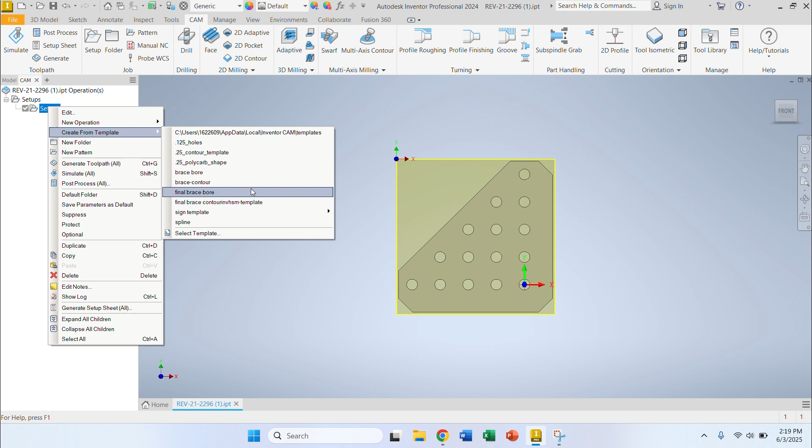So what I'll do is, I have these things called templates. It's a preloaded template, exactly what it sounds like. It's a 2D bore, and it has the correct speeds and feeds and everything like that. So I'll right click, hit create from template, and there's a few options, don't worry about it. It's called final brace bore. So I'm going to open this up.

So this is the inside of the toolpath, the details of the toolpath. So here are your feeds and speeds.

These are vitally important. In a 3D printer, let's say you just want to go 50 millimeters per second, it's one single setting which you change to go fast or slow, how fast the printhead moves. In CNCing, it's infinitely harder. You have how fast the tool spins, how fast the gantry that the tool is on moves, how fast the tool goes up and down, in and out.

So much stuff. So what I've done is I spent way too long, like a year or two, going through online forums and doing testing myself, optimizing it to the tools we have here. So basically these speeds are really good. They work tremendously well. They're not sluggishly slow that it takes forever to do a single part, but they're not too fast that you're churning through drill bits or end mills and breaking them, costing the team a fortune.

So this is what I would go with. And since it's a template, it already has the tool preloaded. So for all of our holes, if they're reasonably sized, I use an 1/8 inch end mill. 1/8 inch is listed here as 3.175 millimeters. I don't know why, that's an 1/8 inch end mill.

If you have massive holes, let's say a 1/4 inch hole, you can choose to do it with this 1/8 inch end mill, or do it as a contour, because the contour uses a 1/4 inch end mill, so that might be a little faster. Or you have to do some weird shape cutout or something. But for a traditional hole for a bolt, that's preloaded like this and reasonably sized, an 1/8 inch end mill is fine.

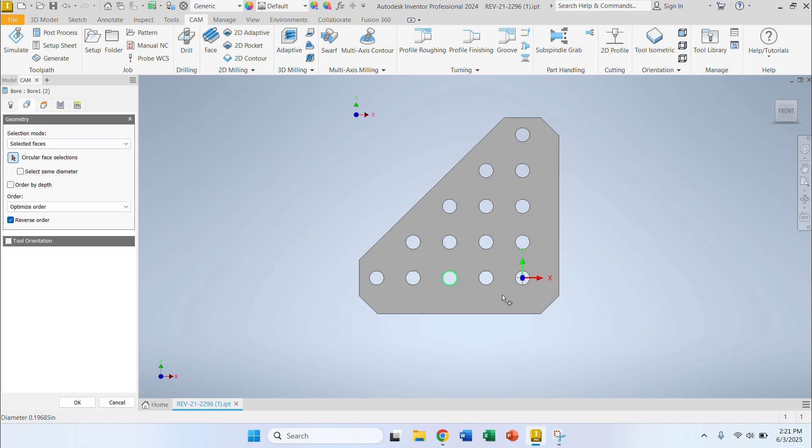Now, so this is boring, right, this is doing all the holes, because you can see here under CAM it says bore. So this is our boring toolpath. So I'm going to go and select all these holes, so it turns green. What's happening here is, actually it's unnecessary, you don't need to know - basically it's just tracing the toolpath and optimizing it as you increase.

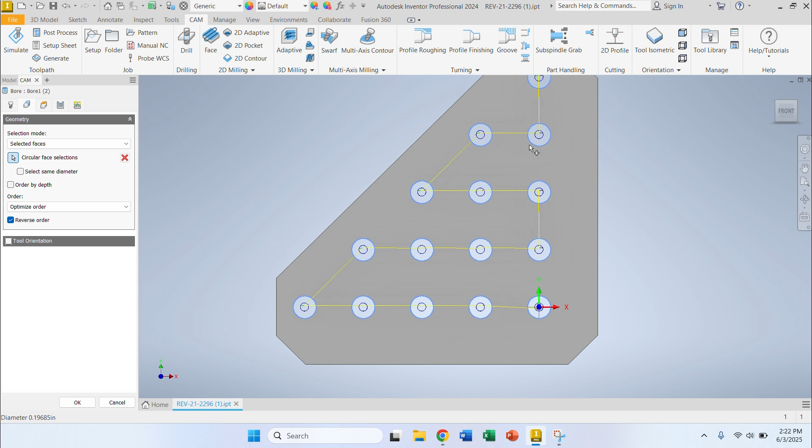So I'm going to select these, a little tedious, but whatever. Okay, there are all of our holes selected. Nice. And now, reverse order, it doesn't really matter, it's just whether it goes into out or out to in.

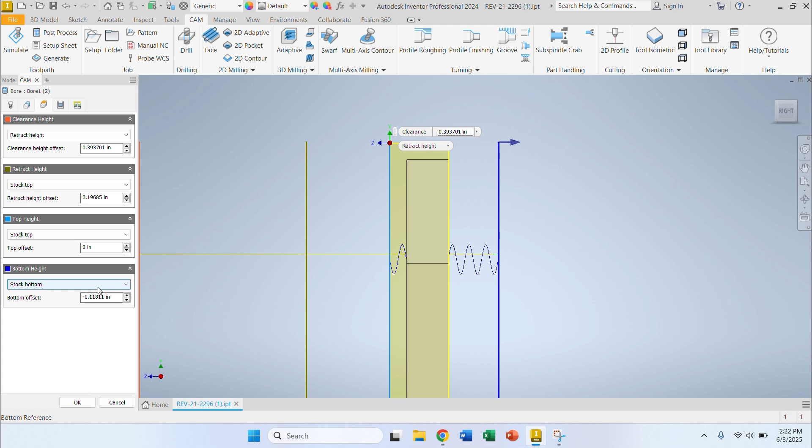And then next up is heights. This is also quite important. So this blue line right here, this is your bottom height. I have it offset right now, that was for something else, so I'm going to set that to 0. Basically, that is like the bottom of your stock and how deep it should stop drilling to. Top height, that is going to be the top of your stock. You can also set it here, stock bottom. And offset is if you want it different, offset physically from your thing, don't worry about that.

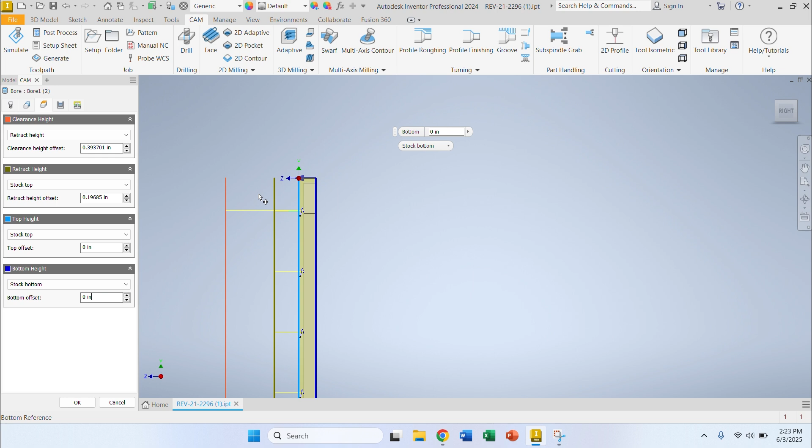Retract height - basically, retracting is if it does a hole, it's going to lift up, move over, and then go down to drill another hole. The point of retract is you don't want to make it too high or too low, just setting it decently high is fine. We'll make it 0.1 inches, that's fine. Oh, whoops.

We'll go. Oh, this video is 15 minutes. Okay, we should speed this up.

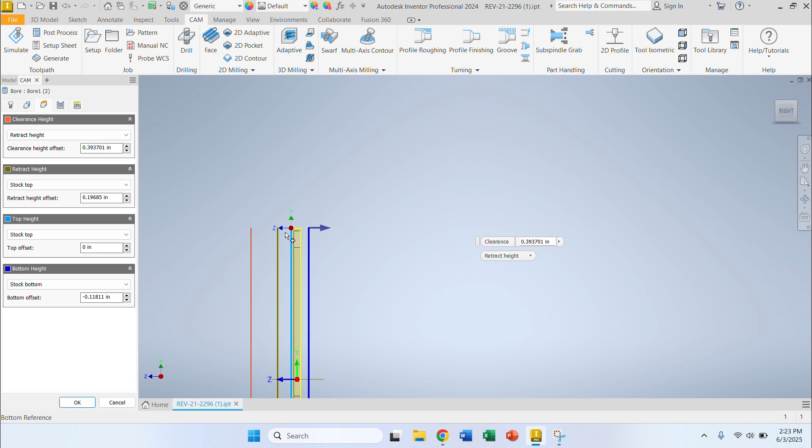Clearance height is basically to make sure it doesn't run into anything. It goes to this height. Just put it decently high up, you'll be fine. Don't touch any of this stuff.

Oh, it's because when I accidentally hit enter, it didn't save. Okay, that's fun, I'm gonna do this again quickly.

Okay, we're good, nice. Now I'll go a little faster.

Create from template. So now we've drilled out the holes, now we want to cut the shape out. I'm going to go down to final brace contour, blah blah blah. Don't worry about the name, it was just leftovers from this thing.

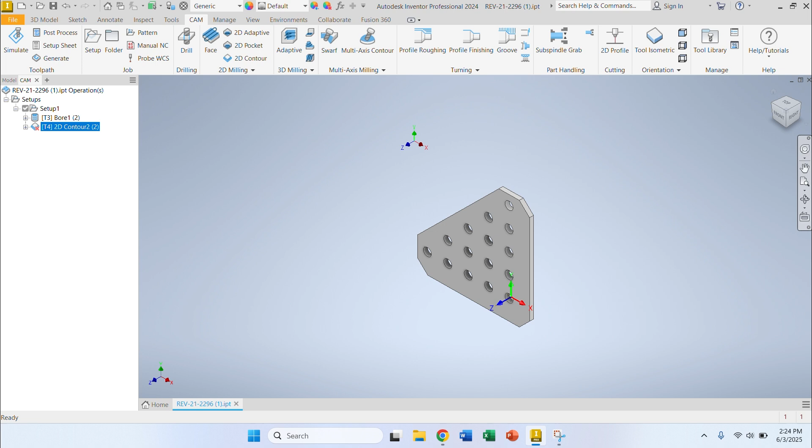I'm going to open the toolpath, so contour cuts it out. Here you can see it's with a 1/4 inch end mill, a little bigger. These feeds and speeds, keep them all the same. Obviously, if the metal is screeching or something, you can turn the speeds down, but do that with the controller, not in the template.

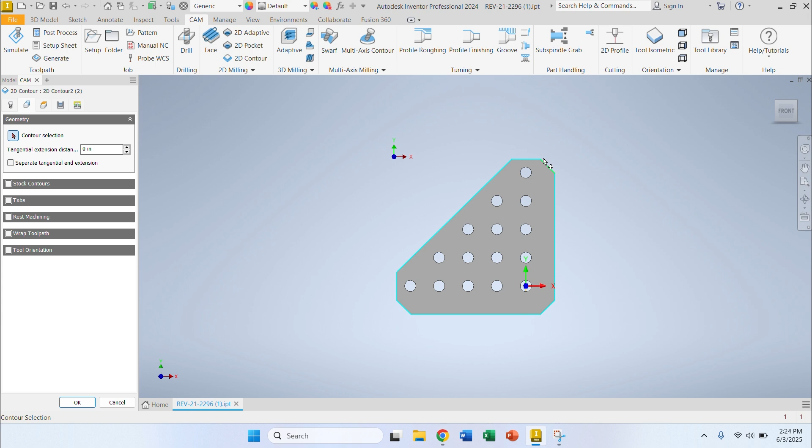Here in the geometry, we're just going to select the outside I want to cut. And then the heights, same deal. I don't know why I have offsets, we'll just zero it at the bottom. Top height, everything else looks good.

Passes. Okay, this is pretty important. Multiple depths, so you're not cutting the whole thing out at once. The roughing step down does a layer and then goes down and does another layer. Usually you want this to be ideally less than half of your end mill diameter. Our diameter is 1/4 inch, so 0.25, so it should be less than 0.125. I'm gonna set this at 0.1 inches, pretty conservative cut, but that's fine.

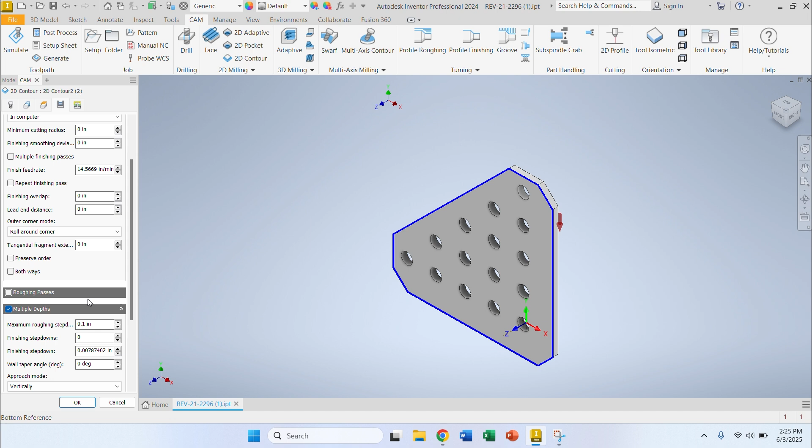Ramping is good. So rather than just going directly down into the material and then sideways, this slowly goes down and sideways. I'll show you later on. But this is better just for preserving your end mill life. Press OK, so now these two are done.

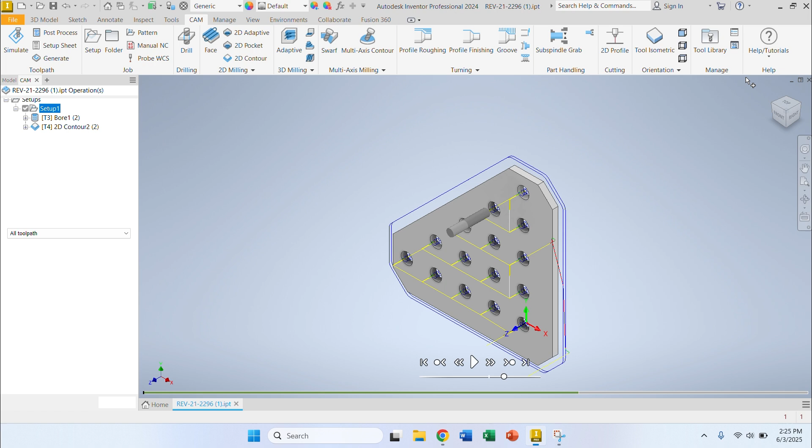I'm going to quickly simulate this. Right click on my setup, hit simulate, and then I'm going to hit show stock. So you can see here, this is what the computer thinks we have originally, just a big block of metal. And then here's our 1/8 inch end mill.

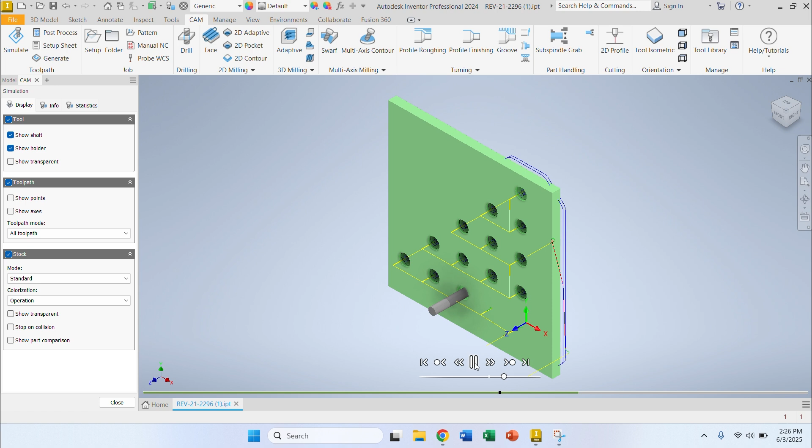It's doing all the holes, and you can see it's doing that little helix, that's also called a ramp. It's a setting in the template. So beautiful, it's looking amazing. Hasn't run into anything or the holes, hasn't skipped one, so just checking.

And now this is our bigger 1/4 inch end mill. You can see here, it does quite a lot, and then just 2 passes. Beautiful, looks fine to me. I'm gonna hit close, and then pause real quick.

I have to get my USB.

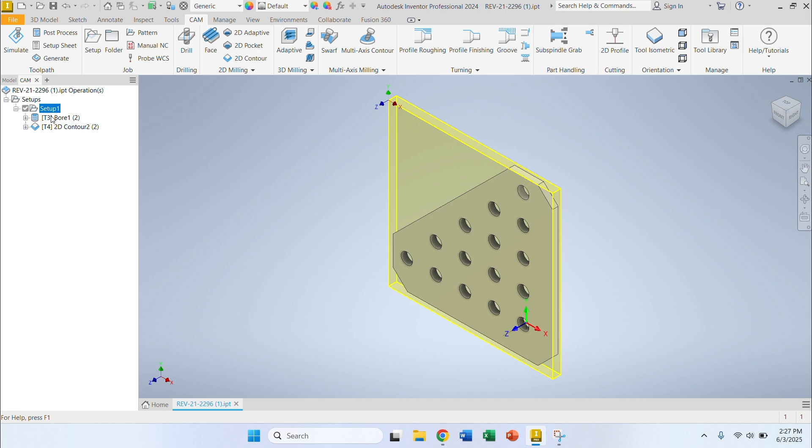Okay, nice. So remember I said previously that this is just generic G code that this will make, and we have to run it through something that translates it and puts it into our machine so our machine is able to read it. It's called post-processing.

So once you've made all your toolpaths and you feel pretty happy with them, what I'm going to do is right click on this one, and I'm going to do them separately. I'm going to right click on bore, and hit post-process. So now here we have, this is your post-processor.

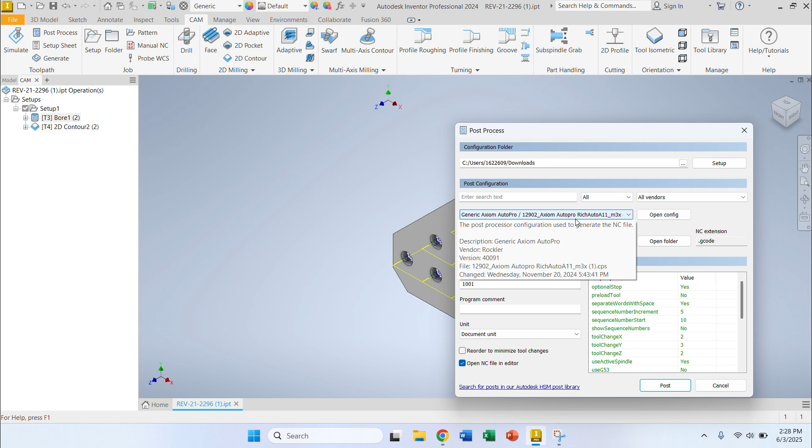This is very important, sorry, it's called an NC program. What it does is it converts generic code, like it says here, generic, to Axiom AutoPro. This file is also in our Google Drive, you can access it, so this is really important. And the output folder, I want this outputted into this file, or this USB.

Beautiful, I'm going to hit post, and then I'm going to hit save. It's called 1001, I probably should have renamed it. It's fine.

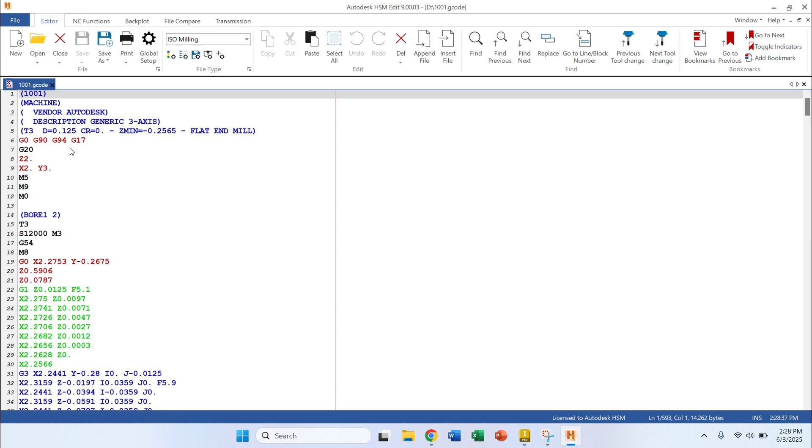Let it load, and then it opens up the G code. This is physically what the machine sees. So as long as there's no errors or anything - if there's an error, it'll tell you, and all this G code won't appear - but this is actually what the machine reads. So here you can see X, Y, and Z.

That's pretty cool, I'm gonna change the file name real quick. We'll change it to bore. Don't worry about the other files, I had to run something pretty fast and I was out of names. So we'll call this bore - always bad capitalization, whatever, but it's always good to name your files.

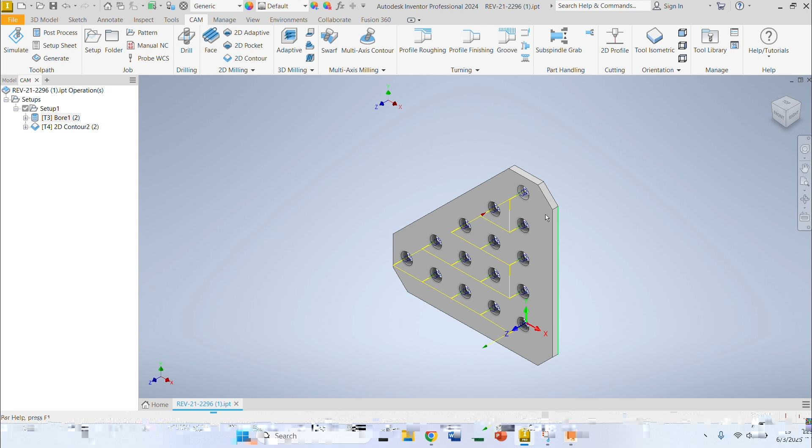And then 2D contour, I'm gonna do the same thing. Post process, all this is fine. Under program name, I'm gonna just call it shape, that's what I call contours. Post. Same output.

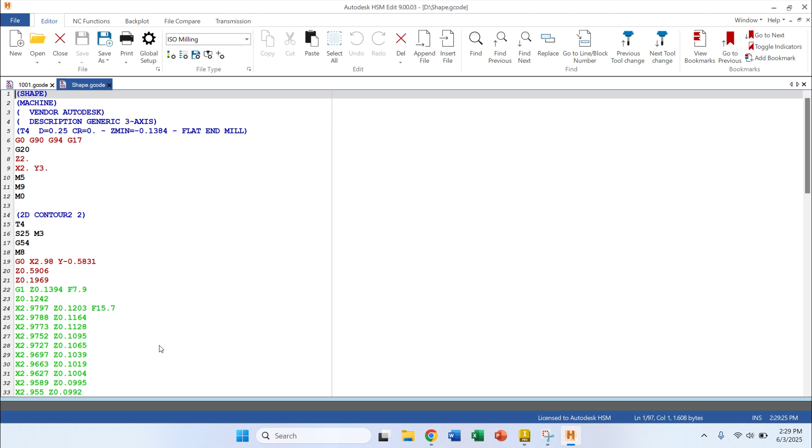Beautiful, it doesn't say big blaring error, and there's G code. That should be all of it. Just under 20 minutes, nice. I'll see you on the machine.